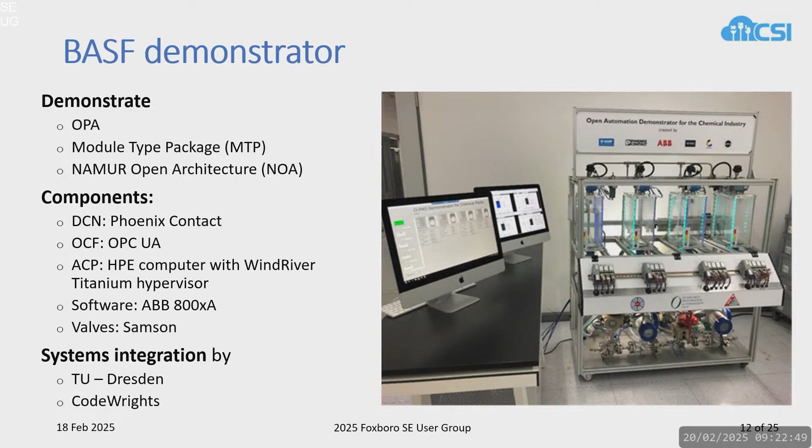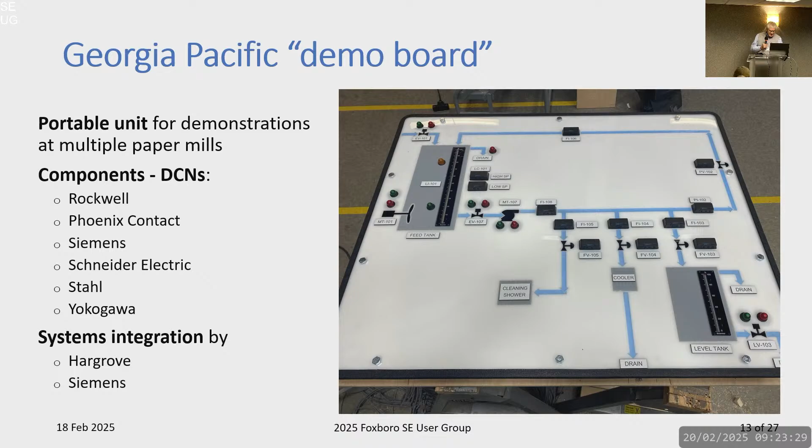Georgia Pacific, this was done by a gentleman, Carl Cherney, in Alpharetta. He built what he called a demo board. This was fairly early work, 2018, 2019, and he tried to assemble component products from multiple control system suppliers. Not really a full realization of OPA, but it was meant to illustrate the art of the possible. This board was taken around to paper mills and shown to people about what the future is going to look like. I don't know what Georgia Pacific has done with this work since Carl retired.

Dow has made a very significant investment towards OPA and digital twin technologies in a demonstration unit in the Chicago area under a government-funded program called MXD, which I think stands for Manufacturing Digitalization. This is a picture of the unit. What Dow was trying to accomplish with it is to demonstrate interoperability among different vendor products, the OPA computing framework, and digital twin technologies. We've had fairly recent discussions with MXD about getting OPA more prominently featured in the MXD testing environment.

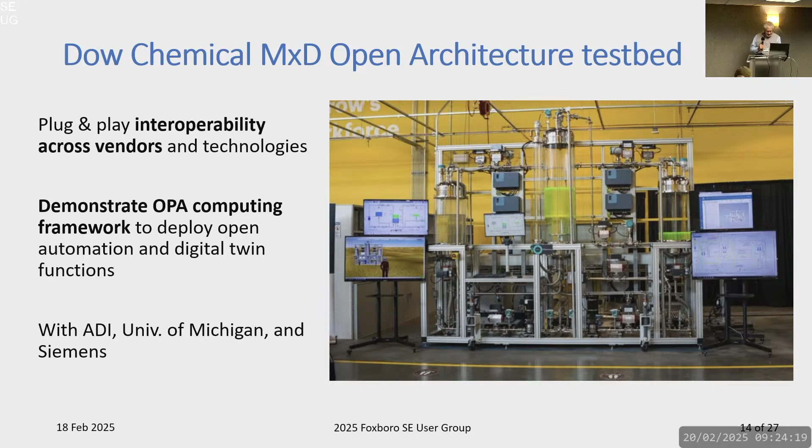My company and the other companies I'm going to talk about in COPA, which stands for the Coalition for Open Process Automation, have provided prototyping systems and training programs with a market offering we call COPA Quick Start. So COPA Quick Start is a fully functional system, suitable for laboratory use. It was not designed for production use itself. Has a lot of computing capability. The COPA group of companies are listed there, and I'm going to detail COPA in a minute, but you'll see EOSYS is included in that list.

COPA now has evolved our market offering beyond the Quick Start training system, and we're actually starting to sell and have sold systems for on-process production use, which I will share more information on in just a minute.

A little bit more detail on COPA, the Coalition for Open Process Automation. If you remember that chart of the business ecosystem, COPA is a group of 15 companies who span all of those roles in the business ecosystem I introduced when I started talking about the Open Process Automation Forum. We have systems integration companies like EOSYS, like Wood, like Burrow Global. We would like to add more. Subsystems integrators like my company, CSI, and another company coming out of Silicon Valley, CPLANE, and hardware and software component suppliers like Phoenix Contact, like Stahl, like Novasmart, like Codesys, for example, and inductive automation, which figures prominently in our offerings for HMI, alarming, and historian purposes. We also have some computer hardware manufacturers in the COPA coalition, ASRock and Supermicro most prominently.

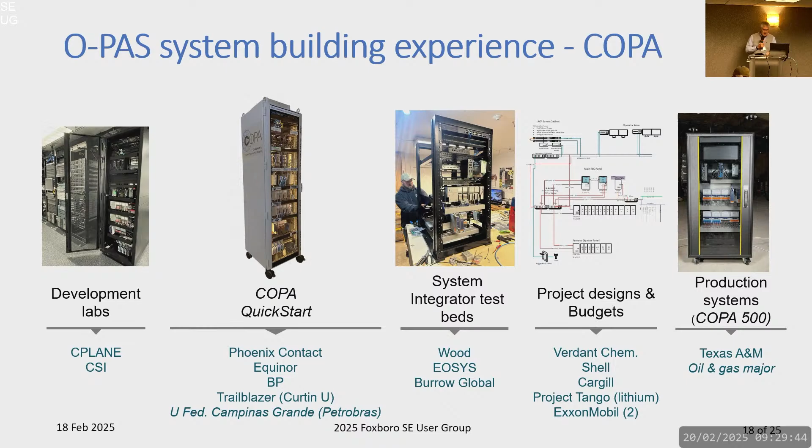So this is some details on our experience base with these on-process systems. The one on the left is the Texas A&M system I talked about. Basically, the footprint of this system we sold them is close to what I have out in the exhibit area. The only thing I wanted you to pick up from this chart is that this is a real project in a real manufacturing facility. It's about 450 I/O. Detailed engineering, the feed study is being done right now, and we will start engineering on that project in a couple of months with an expectation to commission before the end of 2025.

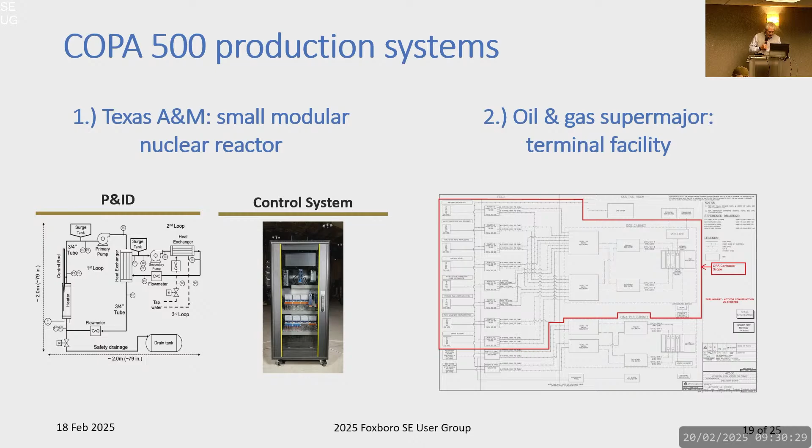This is a one-page summary of our message about what we're offering in terms of OPAS-based systems. Field-proven components implemented in an open architecture against the OPAS standard—that's the tagline. But what are some of the essential characteristics? Decoupling I/O from compute. I talked about breaking those proprietary connections. There's an OPAS industry standard that specifies the interface between I/O and compute.

Because one of the business problems maps back to the fact you really don't ever want to replace your I/O. The motivation for replacing your I/O hardware is in the unlikely event you're going to be replacing your instruments, and that's going to be an exotic case. On the other hand, you do want to replace your computers from time to time to keep pace with the capability of the products in that space. So decouple that connection between your I/O and your compute level.

Interoperable data communications fundamentally based on OPC-UA. Decouple software from hardware, with a couple of sub-bullet attributes I won't spend time verbalizing. Portable, reusable applications based on industry standard programming languages, also taking advantage of what we can do with virtualization and containerization. Build cybersecurity in by design: role-based access, authentication, zero trust. I could talk about all these things, but I'll only do that in response to questions.

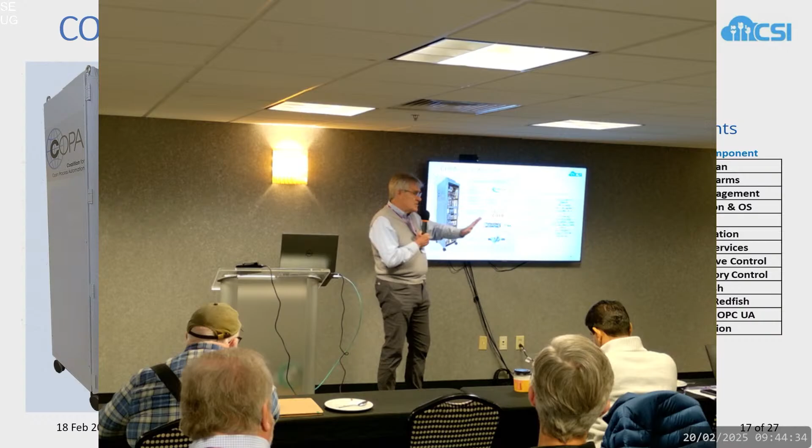So I left this out of the main presentation. This is the hardware and software bill of materials for COPA Quick Start. We may substitute over time, but this gives you some example of who is providing the hardware and software components. In the COPA group, Phoenix Contact and Stahl are member companies. We use Cisco, but we can substitute for the networking switch or networking hardware. For the DCN hardware, we prefer IPCs, specifically ASRock industrial IPCs, and we prefer Supermicro servers. Now we find the operating companies actually prefer, and this came up yesterday, maybe Dell or HP hardware, so that's substitutable there.

I won't itemize the software, Jacques, but you can see by function and by supplier who's used. Maybe a key question is, we actually like the CODESYS software for an IEC 61131 based regulatory control environment. If you don't know who CODESYS is, they're probably, without a doubt, the major hardware-independent software supplier. They've sold somewhere in the neighborhood of 6 million licenses for their software products. So this is how the bill of materials would be worked up for a project, Jacques.

One of the companies you mentioned, Phoenix Contact - Ghazi Azadullah is here in the back. Ghazi is with Phoenix Contact, and they're a member of the Open Group, involved in this effort. We've been talking to them about some of the hardware on our system. They have other stuff to show you out there - they've got a booth. Good to talk to him if you have questions, and talk to Don, who also has a booth out there.

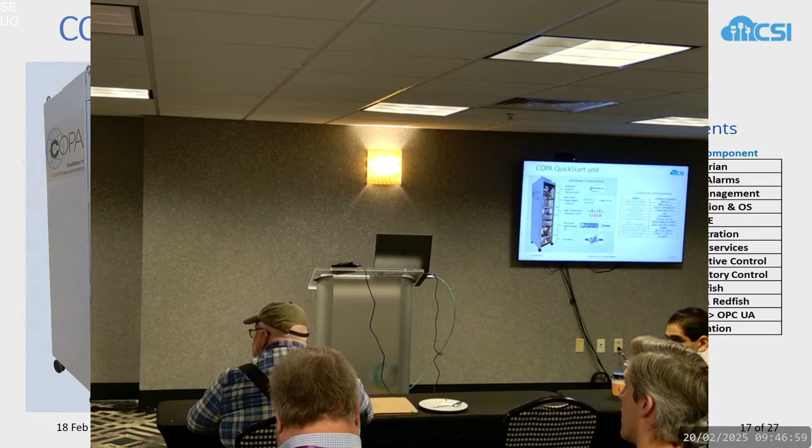I've got a question about fault tolerance and robustness. I'm sure it's configuration dependent, but how does it compare to the traditional dual redundant DCS or a TMR SIL system, like a Triconex or Woodward Governor system?

Basically, there's a number of ways to achieve high availability. You can do it with traditional physical pairwise redundancy. We actually prefer a software-defined mechanism to achieve high availability, so we can dynamically rehost a workload upon a hardware failure. We move a compute workload - there's always a backup, and that backup can be running where you have spare compute capability in your system. So we're taking a software-defined approach to high availability, which is really our lead case.

You can actually include fault-tolerant hardware in these systems - in my shop, we're also using Stratus hardware. If the operating company wants that degree of risk reduction, you can do that. Now, we're not attesting that we're going into SIL 4. In fact, safety systems are out of scope. Shooting for SIL 3 is beyond what we're currently targeting. So I'll answer the question that way.

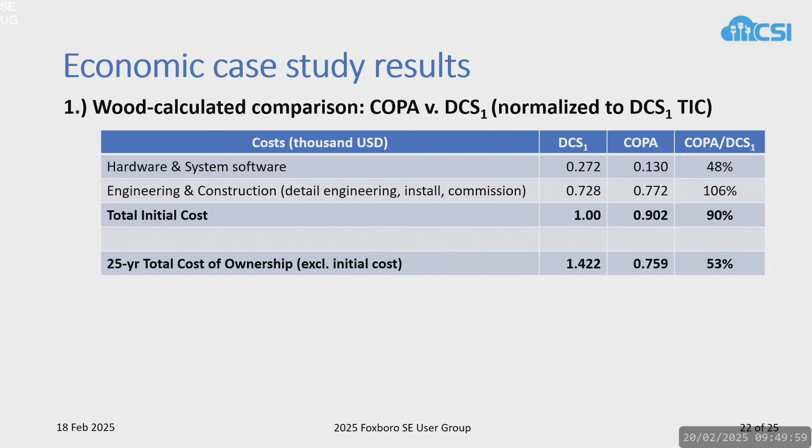Okay, so I'll make a couple of comments. That's where the role of the gateway would come in - I'm going to answer your question somewhat strategically. I went through the reference architecture pretty quickly, I usually use it to define terms, but let me go back there.

The other thing to think about for the future is this NAMUR initiative called Module Type Package. This doesn't help you in the brownfield, but in the future state, if there are still proprietary PLCs in this market, if you conform to the NAMUR MTP standard, you have to at least expose the internal workings of the control on your packaged unit so it can be interfaced to at the supervisory level.

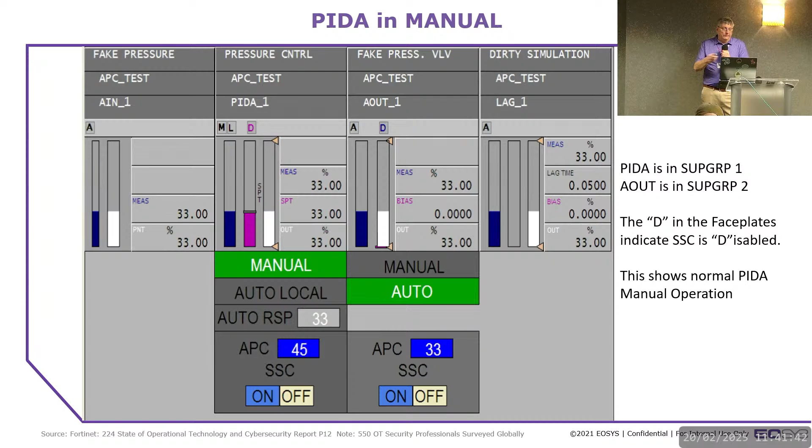Then we can put it into auto and local, like I said, now we're just running down the thing. Now the D on the faceplate up here doesn't even show up unless you have a supervisory control set up, the SUPGRP, and then you'll see the D, and that indicates that it is disabled—supervisory set point control is disabled. And on the output, the D is telling you the same thing, that we're not driving it from somewhere else.

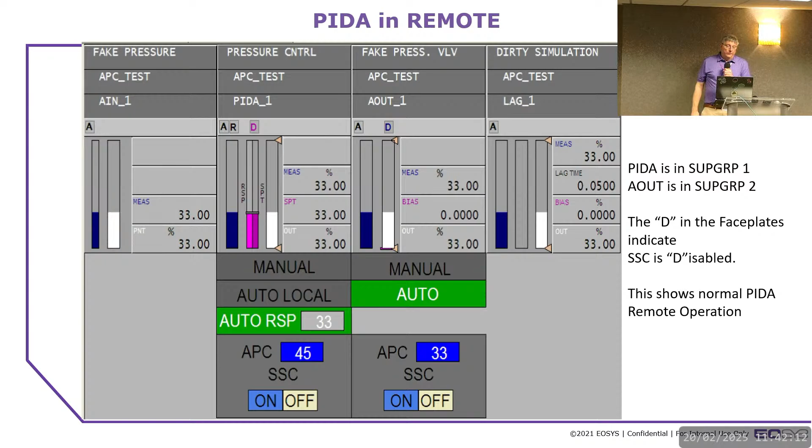This is auto with remote set point, same thing. You can see we still have it disabled.

Now we have enabled the supervisory set point control. Again, this can be coming from an APC system, your advanced process control. This could be coming from some sequence logic that you wrote to drive this, or it could be coming from OM sets. So depending on how you want to drive this, you just connect to another block to get that supervisory input. But if you have an unsecured connection, it's available.

At this point you see that we go into E, okay, on the faceplate up there at the top. It's tiny, but you also see that the green isn't quite the same color green. That's because when you have implicit handshaking on it, the block is now waiting to see an output change on that supervisory input to go into a control state. So it will sit there holding its last output, doing its thing, until it sees the supervisory control actually write a value in.

When it does write a value in, notice that our little color on the block down there where it says APC changed to green, and the C goes to controlling up there. At that point, this guy is in supervisory control.

Well, okay, what's the big deal? They got supervisory control. The big deal in this is going out of supervisory control, your APC, if you were to fall back to, in this case, remote, that's based on your local remote switch.

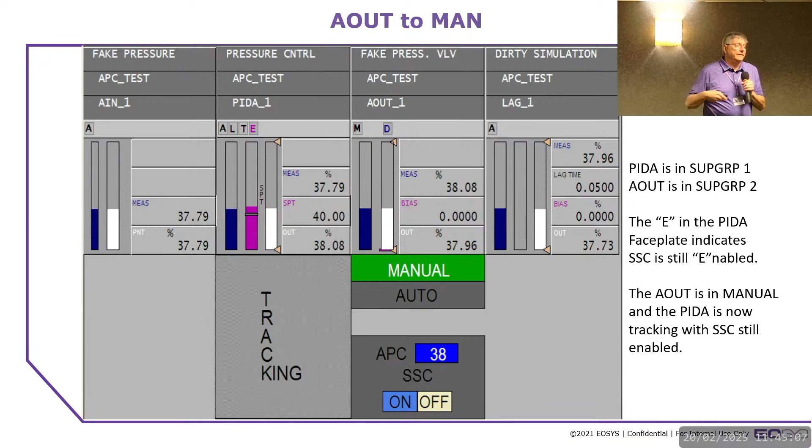But at this point, again, what we're trying to show is the fact that all of these interconnections are all bumpless, they're all built in. So now we go to APC. Well, if we grab from the APC the A out block, not the PID block, we're not working off the PID block, we're working off the output block, and we're going to let the APC just manipulate this output.

Once again, when we do that -- and this is in a different supervisory group, and I did that on purpose so that I could manipulate the output independently -- you can see that when we turn the APC on, the output goes into E for enabled, and the PID goes into E for enabled, and everybody is just hanging tight until the supervisory control writes a value down to that analog out block. So at this point, your process is saying, okay, I'm waiting for that guy to tell me what to do. As soon as we make a change, I change the output from 33 to 40, we go to controlling on the analog out.

So now we flip this guy. Maybe you've got two loops, two advanced process control constraints you want to work with. This guy can now drive the analog out, and we're still in a good spot on the PID.

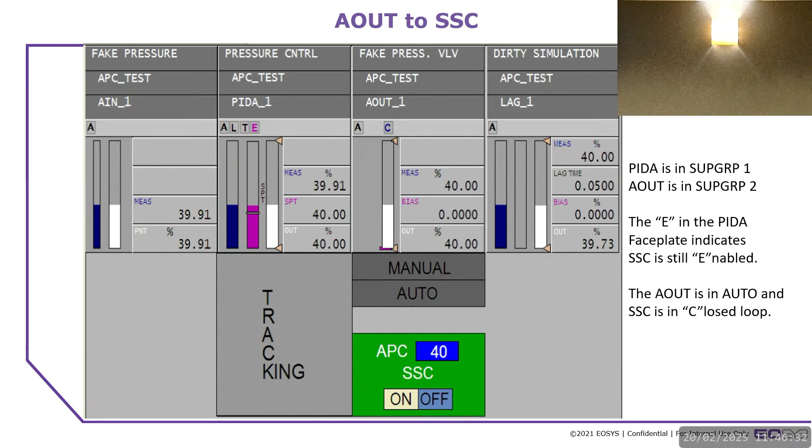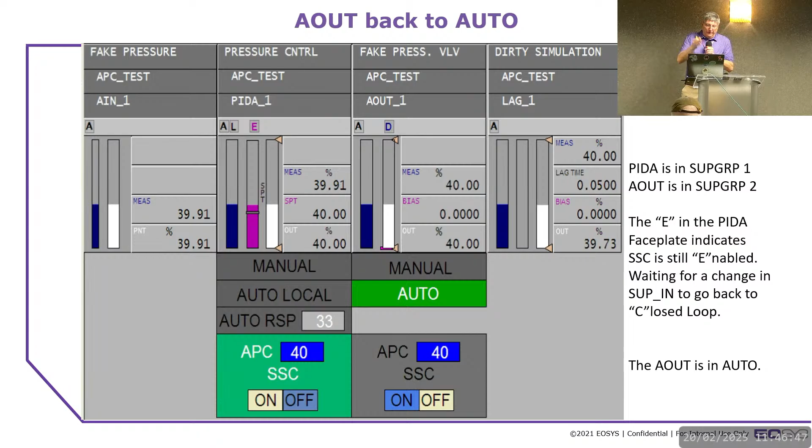And then the next part of this is we flip that guy back into auto. Hey, look, without anything else, we just said we don't want to be in supervisory control on the output. The PID is back to state enabled, but as soon as we did that, he came out of tracking, and he's waiting for that APC to write a value down to him. As soon as that value changes, he goes back into control on the APC.

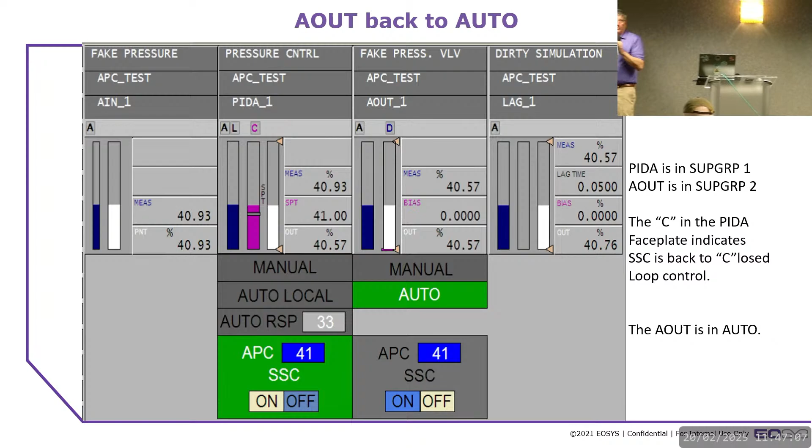And all of this stuff again, it handles it very well -- these set points, these blocks, the way they track, the way they come through. So you have an option there: you can actually work the output directly, manipulate it, and it gives you a clean way to set up multiple inputs into that system.

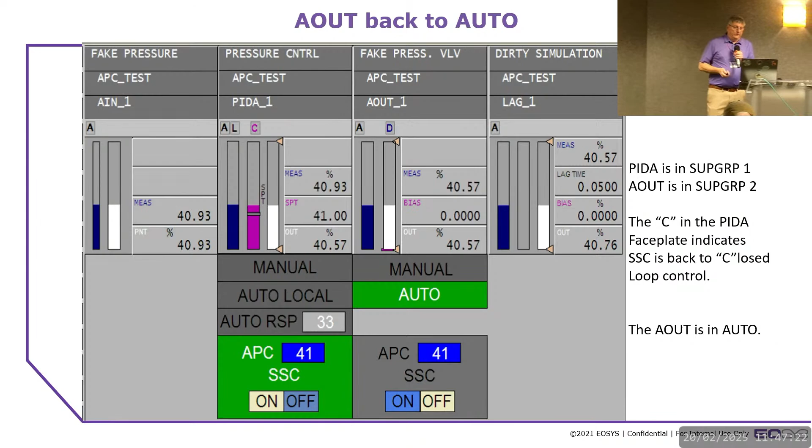So I'm going to just jump out because I don't think that's worthy of any questions at this point. Marcel is going to talk to us. Oh, and these two topics are related. This is why we got them all together.

The APC, a lot of people are using OPC, and we're now going to be talking OPC-UA. That's what this topic is. But most people are using some kind of OPC to let their APC talk down to the controllers. That's why this is in this topic, because these are ways you can get down to those blocks.

The next thing I'm going to let Marcel talk about is Foxboro Schneider now has an OPC-UA server. And then when they get done with that, Kevin White and I are going to talk about the OPC-UA client. Both get a microphone - if you step over there to Matt, he'll give you one.

All right, so the OPC-UA quick reference. This is Kevin White from Alabama River. I appreciate him coming up here and helping out with this - he did the heavy lifting down there. And Arlie Bright, who is so smart he doesn't even come to these conferences, did the heavy lifting for us. So I'll be playing the role of Arlie in this, and that's why when I get confused, I'll just look at Kevin and go, I don't know, maybe Arlie knows.

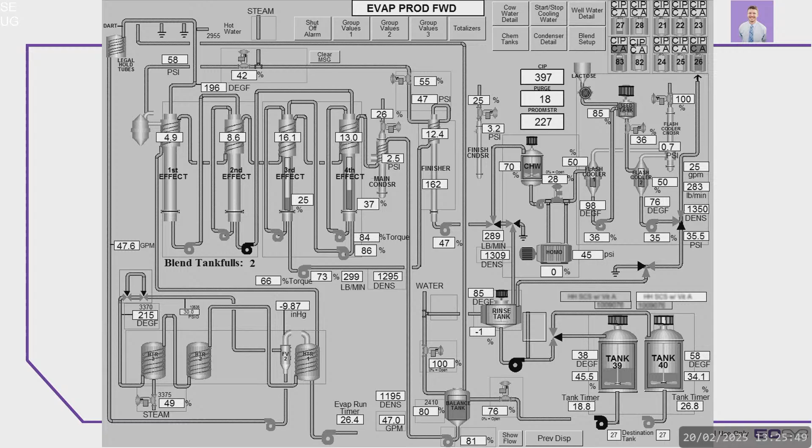The other piece that people say a lot is to get rid of the 3D objects. You see a lot of realistic looking graphics. So, this isn't great, but I took Visio and I said, okay, now I've gotten rid of all my 3D objects. Is this a high performance graphic now? Still not. So if there's one thing that I can get you to leave here and remember, it's that ISA 101 and high performance HMI is more than just grayscale.

I'm next, and I'll just say I'm not going to go through the standard in detail. We talked about a few points of it, but the biggest misconception is that ISA 101, the ISA standard for developing HMIs, is not a list of rules. There are very few things it says you cannot do. What it is, is a guide through that process. It tells you that you should think about how you use color, how you navigate between screens, and make decisions that help your operators.

So at a very high level, it specifies, in blue here, an HMI philosophy, an HMI style guide, and an HMI toolkit as the starting point of this process. You go through those, and two of those are documents. The third is your HMI library. It talks about designing HMI screens, what kind of questions you should be asking, how you should think about these problems. And then lastly, it goes past installation, into how you maintain and manage these HMI graphics going forward.

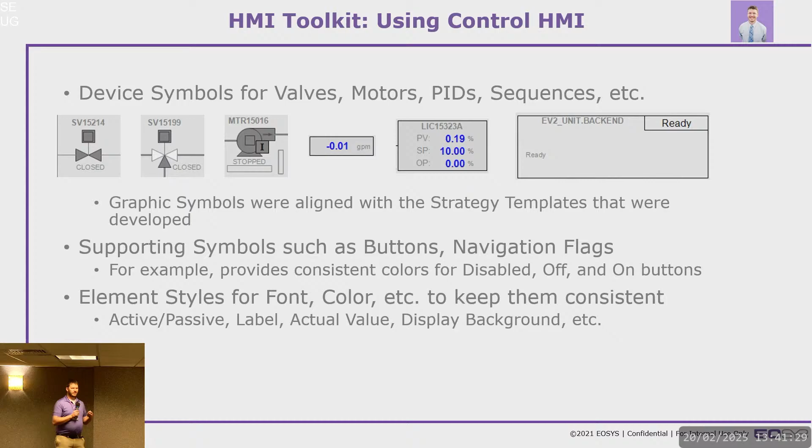Element styles are another feature of control HMI. There are a bunch of element styles, which if you're used to FoxView or Foxdraw, are like conventions but better and easier to use—you don't have to copy some random file or go look up the manual. You can configure your styles. Some of the built-in ones are the active element style.

I'll contradict you a little bit, Bob—I don't know if you realize we did this, but we didn't use the built-in colors. The two we swapped were active and passive. The default was dark gray for running and white for stop, so we swapped those in the element styles, and it updates everywhere you're using that element style.

Yeah, so I list a few examples: active, passive label, so that your text size is consistent for like a device tag, actual values. You can kind of pick what is part of your style - font color, font background color, font size, all of these things you can have be part of that style, or just leave it off and set it on a case-by-case basis.

All right, so now you've got your standards, if you will. It's time to go figure out how well they work in the real world. This is potentially your first project, so I'll be repeating Bob a little bit on some of this stuff.

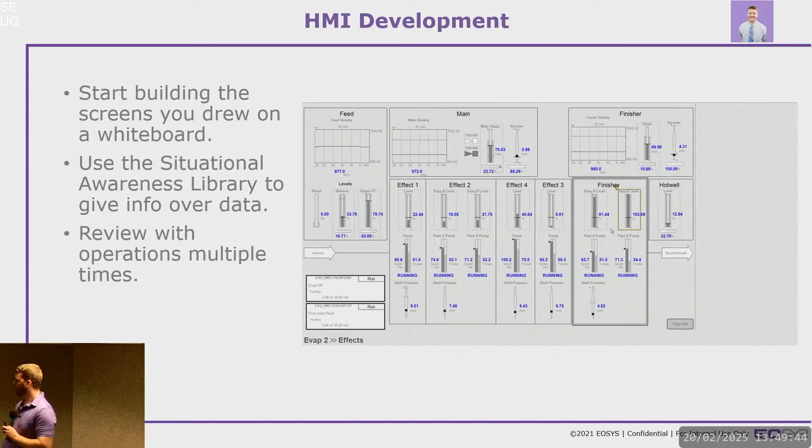That could have been a whole presentation by itself, but we came out with these whiteboard designs of what needs to go on a screen. Then HMI development, you've got your toolkit, so hopefully this is pretty quick. You start building those screens based on the whiteboard.

I mentioned the situational awareness library is included in Control HMI. So a lot of these symbols you're seeing, the vertical bars, horizontal bars, a lot of that is based on the situational awareness library. You can duplicate that and customize it a little bit, but it gives you a lot of good starting points.

And then lastly, through this whole thing, again, one of the areas of projects we didn't do that well was going back to operations. It's always hard for us. I imagine it's the same for you guys to pull operators from their daily activities and get them dedicated and focused to a project that's not going to finish for 6 months. But you'll save yourself time in the long run, as we've all learned before.

The last comment I'll make is that with high performance HMI, it's very much not like, okay, we've designed these screens on the whiteboard, that's what you're going to get. It's very much prototyping, showing them something, listening to what they say, coming back with something different, offering up different ideas on how best to give them the information they need.

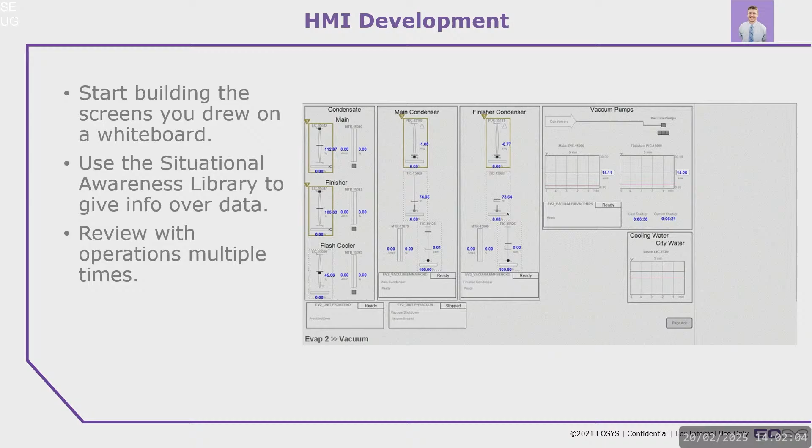Yeah, the long answer is the standard - I won't quote that to you. The medium answer is a book called, Dave correct me if I'm getting this wrong, the High Performance HMI Handbook, I think - I might have gotten one word wrong there. But it's a thin book, a couple-hour read that talks about the guys that came up with this, they did studies and trials, all for the purpose of - the name gives it away - situational awareness. You want to be able to quickly understand what's happening with your process.

So that, and getting rid of a lot of - I won't call them bad habits, but maybe artifacts - of, you know, when HMIs first went to graphics instead of panel boards, it was like CRT monitors and oh this is so cool, we can do a lot of stuff. So in a lot of ways it's going back to what the panel boards gave you, in that you could look across a panel board, all my lights are in a row, all my analog dials are straight up and down, everything's good. So a lot of it is really inspired by that type of quick glance.

Your operators, they had previous FoxView experience? I mean, they were control operators already that were moving into this area. Yeah, absolutely. We used the operators from the existing evaporator to help us start the second evaporator.

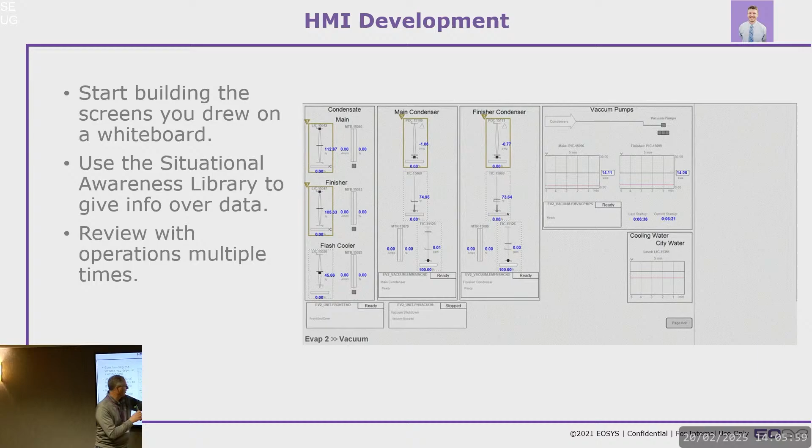If we're over, I apologize. But another thing - you'll see these arrows for navigation. When you push those, you go to that next section, and when you land on that next page, it'll leave your little button where you came from highlighted for a moment. I really like the navigation - you guys did a good job on that. That's not something I specifically asked for, but I do like it. There's another real question quick, over there.

I don't know the Control HMI product that well, but I know in FoxView there are some hard-coded indications from the control system, like cyan being out of service, red being under range, over range, green meaning something else. Did y'all have any landmines there? Does Control HMI enforce those same colors, and did you step on any toes? So were they any of that?

They default to the same colors. Similar to element styles in that same configuration - you could change it to not be cyan, you could change it to be something else, but by default they set the defaults to look like FoxView FoxDraw.

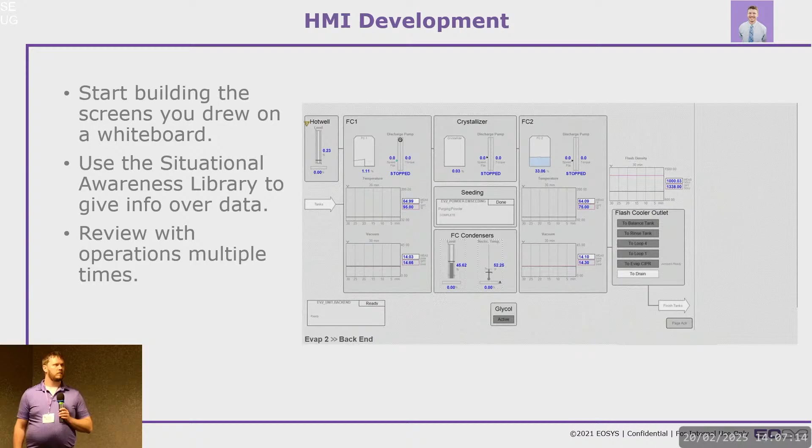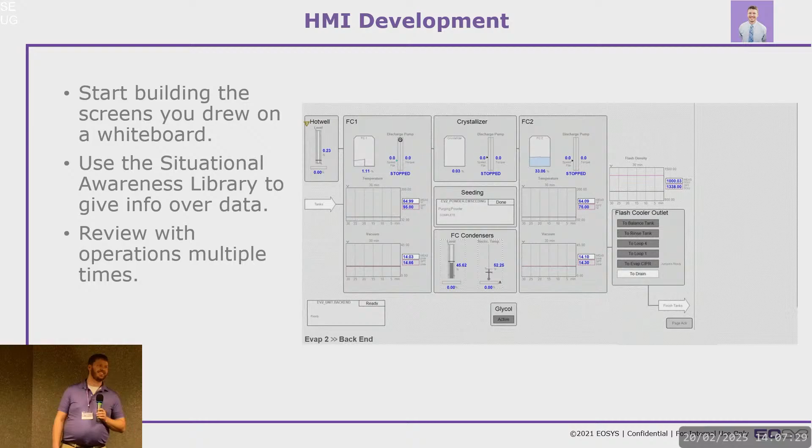I know years ago when I first went through some of this stuff, I went to the local university and said, hey, I want to learn about the abnormal situation graphics, not Control HMI, but that stuff. I'd read the book and went to the engineering department at my alma mater, UAH, and they said, you got to go to the psychology department, the guys that do that are over there. And I'm like, yeah, I'm not allowed over there anymore for a lot of reasons. But that's where they still got studies of me going over there.

But yeah, it's kind of interesting because this is all an engineering discipline, and we have to implement it, but all of these are human factors studies done by the psychology department. So it's not stuff that kids are coming out of school with much background in. There are a lot of books on it, and you can read a lot of stuff, but it's not things we got exposed to as engineers. So we're having to go back and learn that.

It's kind of funny - I joked with Don early on. You kept saying you were talking about operators, and I said, who are these operators they keep talking about? We'll just tell them what to do. I mean, it's like - but that's not really the way to go. I know that, but anyway.

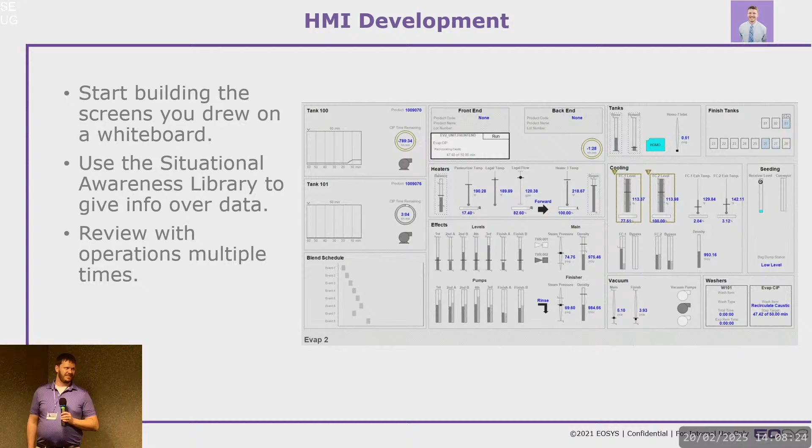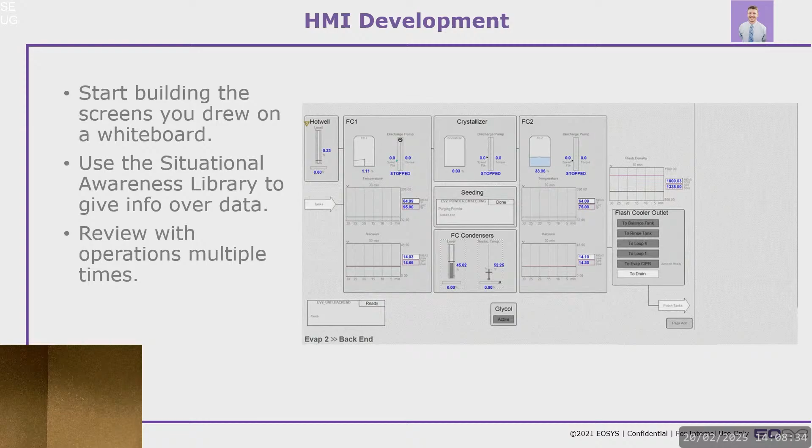The old FoxView, the nice one, you say? Yeah, that's where the plant lives, right? And so when you do this, you have to give all that up. Yeah, it's a good way to see how it works.

It's busy for an operation. Can you tell me what's going on in the screen? It's busy, and to Dave's point, this is not based on human performance, whereas the high performance one is. There's a reason why it's still called situational awareness with high performance graphics. There's a reason why those terms are used. This really doesn't. I'm not saying you don't have the right to like this - a lot of people do love this - but this isn't that.

Oh yeah, this would be a level 1 screen. No, I'm not saying this is not a level 1 screen, anything - but like the level 1 screen is a depiction of this, but it has areas. It has this effect - it's level 1 in scope, but not in detail.

So there's just too much information on this. When you get into a level 2 screen, you start drilling in on an area and what's important - they call these their blend tanks. So I'm blending, I'm looking at the blend screen. They had quad monitors, so they kept usually a bunch of level 2 screens up, and maybe the level 1 and then 3 level 2 screens.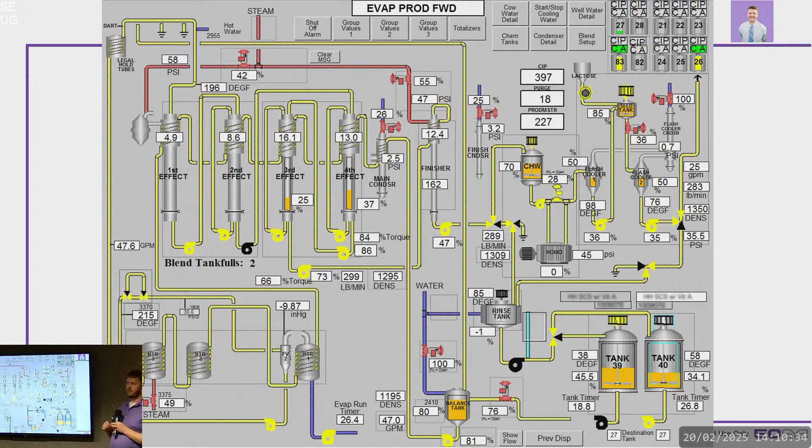Until you need to go do something abnormal. If you're designing it, anytime they're going to a level 3 screen during normal operation, you should think about why - that should be an abnormal situation or some kind of manual intervention. That level 3 is the level of detail - like if you took this and made it bigger, that'd be a level 3 screen.

So if you make your navigation flows, you can still kind of follow the process through, device by device. Like if you're trying to figure out why you don't have any flow, you follow that through. That's one of the use cases, one of the functions the operator needs.

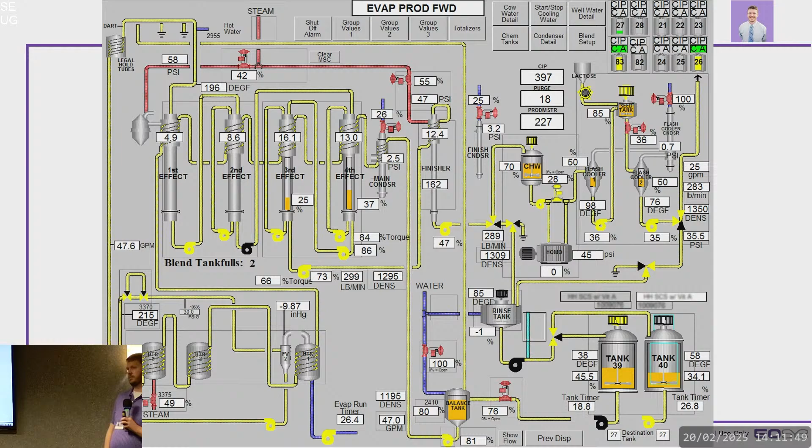So guys, just to comment on that screen - there's too much color on it. I agree with you as far as the standard's concerned, but you cannot get away from having a process flow, because you have to understand that the outside operators will come into the control room trying to learn how the overall process works, and you've got to have that. If it's just faceplates, back like it was a long time ago on the panel board - and some of you guys that's got hair as gray as mine probably remember some of that - it was very hard to train operators how to run with just faceplates or a panel board, versus if they could actually see how the process went together, they understood it better. So I think it's wrong to get away from process flows like that.

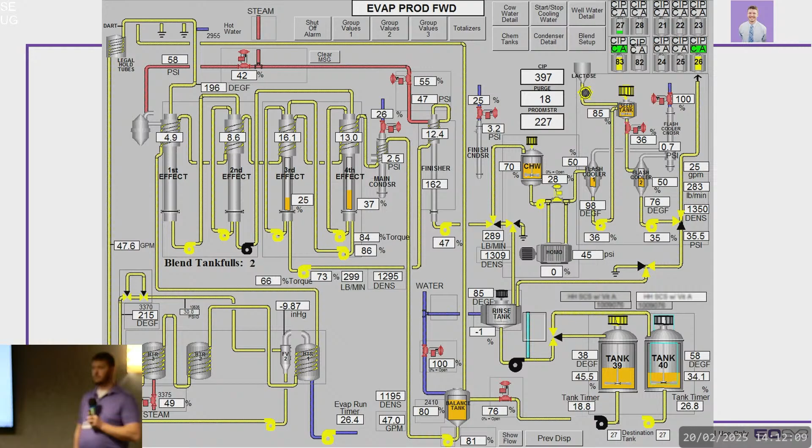That could easily be cleaned up, and possibly that gets cut into two graphics based on wherever the break could be, based on how you would start and stop it, so you're not having to switch back and forth on graphics or what have you. It's just a comment. Yep, understood.

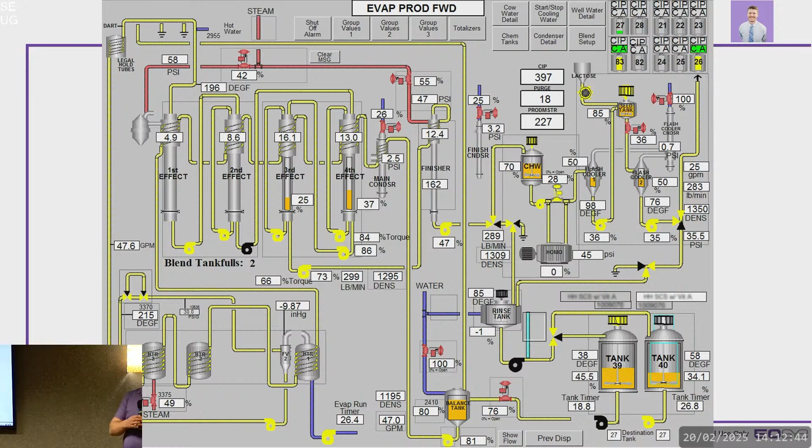And another comment I'll say, as far as getting operators involved, I think it is very, very important. But if you're putting in a new system with existing operators, you have to teach the operator. First of all, usually just pull one out - that's where I've been very successful - pulling one operator out that the other operators respect. So you pull that guy out, and then you show him, because they know what they have now. They're experts on it, but they don't know what they could have. So if you can show them what they could have and how it could make their life easier, they'll get buy-in, and the rest of the operators will buy in off of that guy. That's where I've been successful.

You mentioned one operator.

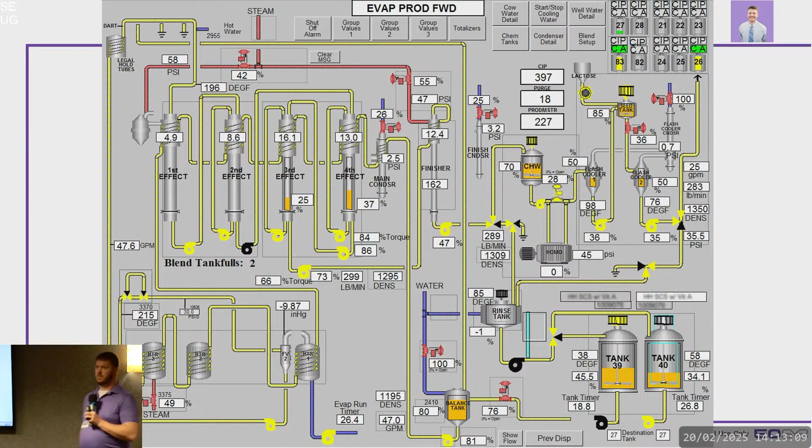I want to touch on that. We definitely had, I think in the early design phases, more than one operator. As many people as you can financially pull in to get ideas from in the back-of-the-napkin phase, because sometimes your best ideas come from your worst operators, because they think different than your best operator. Your best operator is an expert. If you have to explain something to somebody who doesn't understand that well, you get a lot of good ideas in that phase.

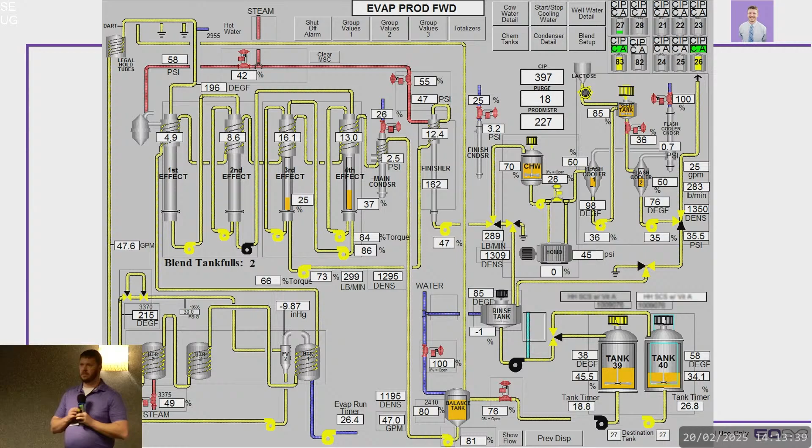On this project, like I was mentioning to Bob, I want that operator who's as cynical as can be about it, but without completely sabotaging it. You don't want the operator that just agrees with everything you say. You want that feedback, even if it's a little demoralizing to have them complain about your graphics all the time. What they're saying is real, and you just got to pick out the parts of that that are useful.

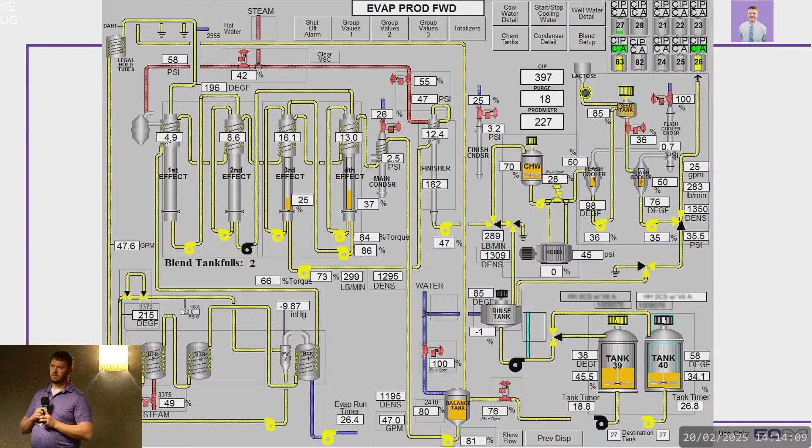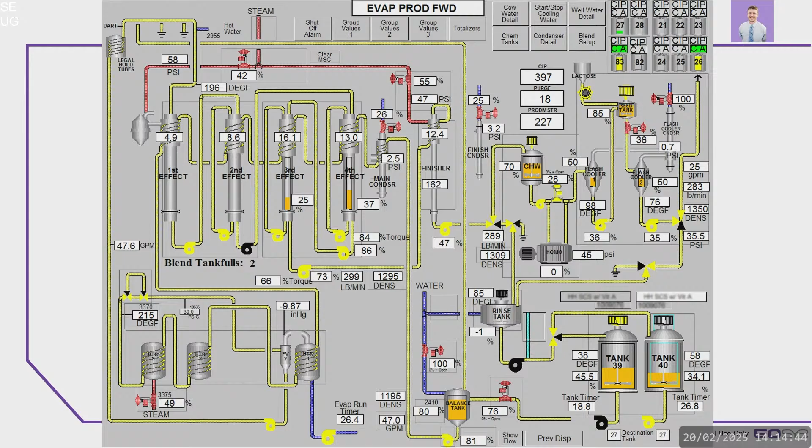I'm not sure about the other facilities, but I'm not the one training the operators where I come from. In your experience, one other thing - we may have a high turnover of operators - what is the experience of, say, a lead operator or whoever's training new operators, as far as one versus the other? Is one onboarding quicker?

So I'll give you two answers. The first answer is from the high performance HMI studies - that's one of the metrics they use to determine, hey, we should start doing this. It made very little difference to experienced operators if you went to high performance HMI. They're so good with the graphics they have, they know where to look, they don't have to find the number on the screen, their eyes go straight there. Where it really brought advantages in the studies they did were training new operators and having them respond to abnormal situations.

In my experience training, I can only give you a part of an answer, because when we install systems, we work with the operators there. We don't stick around and see them train an operator six months later. So there's not a lot to add there - I would stick with the textbook answer on that.

Since the beginning, like when we started, you guys were mentioning one operator that had that strong personality - somebody comes to mind, we definitely had that. Second thing I want to say is that person has already trained a couple of people on this system. So this guy who was the strong personality, a little bit of an opposing view, is now not only using it every day, but has trained a couple of people already. That's up to operations, but from my perspective, it looks like they're kind of taking off with it, so I don't see any negatives there. I don't know if that answers your question exactly.

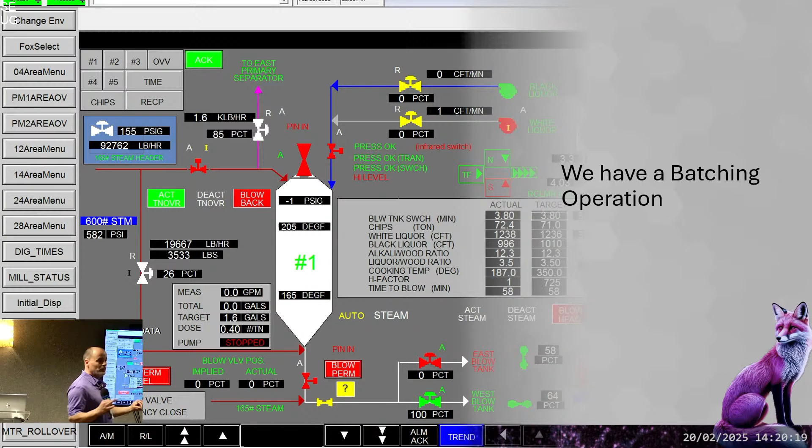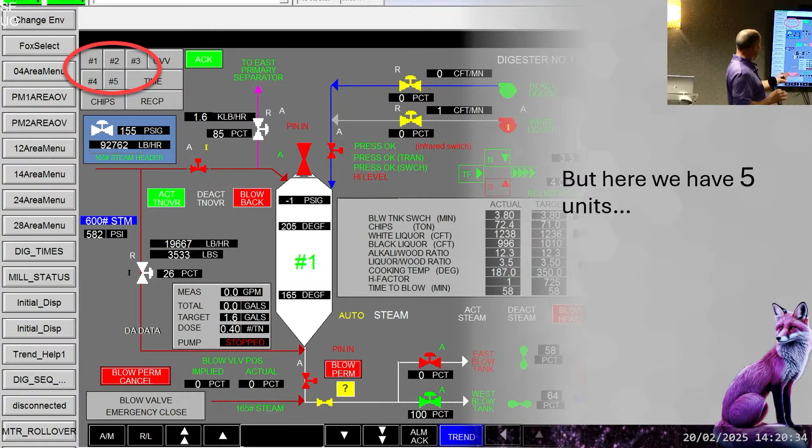So here we have a batching operation. Easy enough. But now when you say, hey, we've got 5 of the same one, and we want to make sure they're all consistent, we have shared resources, shared destination, blah blah blah, it all gets more complicated. Now throw in the fact that it's all written in HLBL, so that makes it even more complicated.

So let's make it real for a second. You hadn't thought about this sequence in months and months, and if it was me, days and days or hours and hours is enough to completely forget this. So now you get a call in the middle of the night. It's 2:30 a.m. Saturday night.

You stayed out late the night before, didn't get in bed until 8 o'clock. So then the operators, what do they do when they call you? Every one of them is like, everything is broken, we're behind, everything is backing up, we got to have you here as quickly as possible.

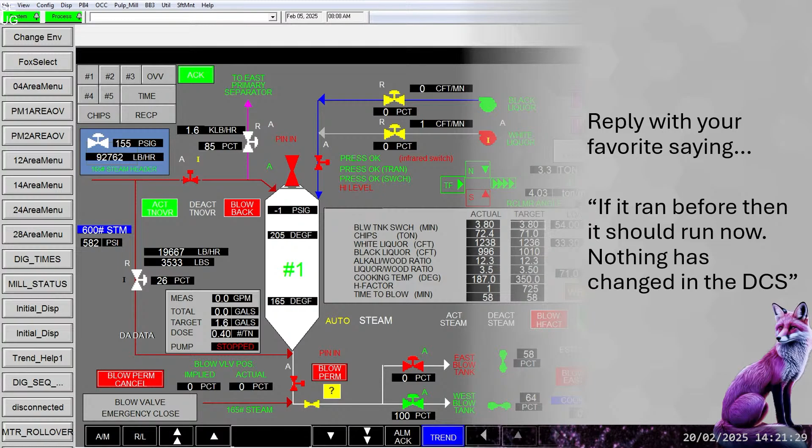One of the first things that comes to your mind is, it's not a DCS problem. If it ran yesterday, it's going to run today. Nothing has changed. Then they tell you, hey, the mill manager is here and he's there to help - in other words, get out of here as quickly as possible, right? So we grab our coffee, we head to the site. Here we go, let's jump in.

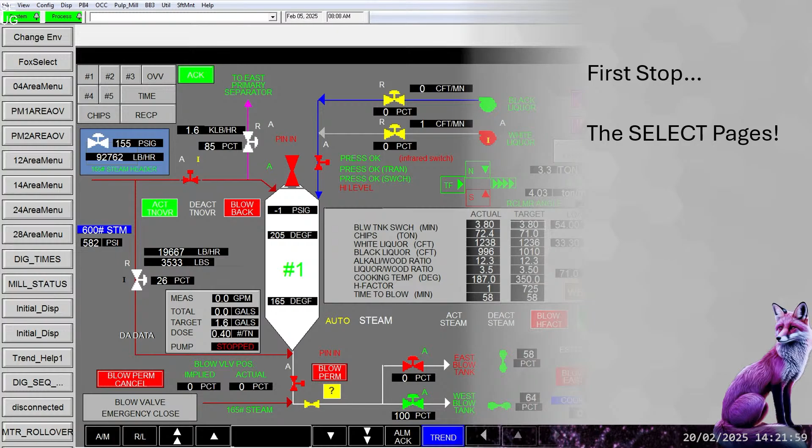First stop, everyone does the same thing - let's run to the select pages. So, prepare to be amazed, mill manager. Oh, crap - we're in the wrong AW in front of the mill manager. Hi ho, hi ho, off to the right station we go, to stay in character with Dopey, right?

All right, so now we finally get to the right AW. We got the right sequence pulled up, and now we expand it. Hey, everything's looking a lot better, right? All of a sudden you see, wait a minute, this line - you can't see everything, right? And you see the 'and not.' That means and not everything is shown.

So then you look a little further down the page and you see, hey, I can read this, I get what it's doing, but it doesn't make any sense to me. If you have good programming, if you were looking at the actual logic, you would see this line is closing the liquor valve. Down here, we're setting the white liquor accumulator. So this is a preprocessor helping you out.

It tries to hide a lot of the stuff from you. So let's go and look at the actual logic. Now, thank you, Foxboro, for putting this little source code here. So yeah, let's jump in.

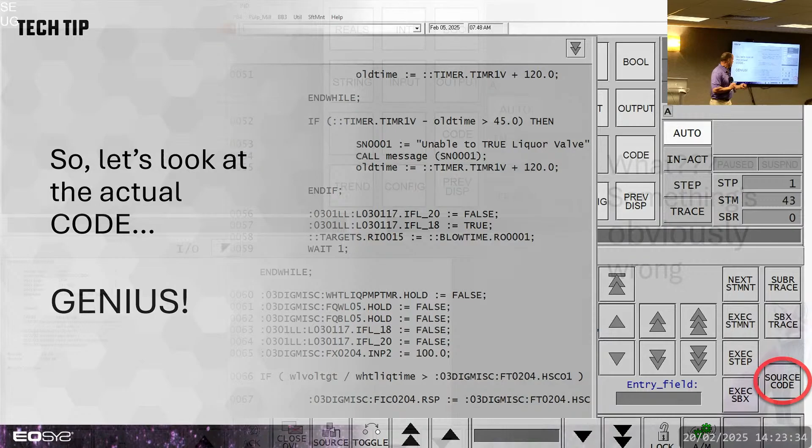Wait, this can't be right - that's all there is for this sequence when you pull it up. Go to the S file, sure enough, all it is, is include files. So guess what, you have to find the include files, right?

When we finally find the troubleshooting screens or the actual code, all of a sudden you don't have the numbers out here, so you're going to have to figure out where we are in the logic, right?

So after this is all said and done, the question is, how do we improve? And if you're like most of us, you build some sort of a troubleshooting screen, right? In this particular episode of what we did, we actually built a troubleshooting screen. To fill you in on the number of sequences we were dealing with, this is all of the sequence blocks you're dealing with - the ones that are inactive are gray and the ones that are active are white, right?

So it's not really high performance, but close enough for us who think gray is high performance. So let's go a little deeper.

So you select one of these buttons and we come to level 2. And the level 2 graphics, you'll notice, hey, look, here's all the logic broken down into segments. And not only is it just the logic, it actually has the subroutines and the exception handling and all of the logic as well.

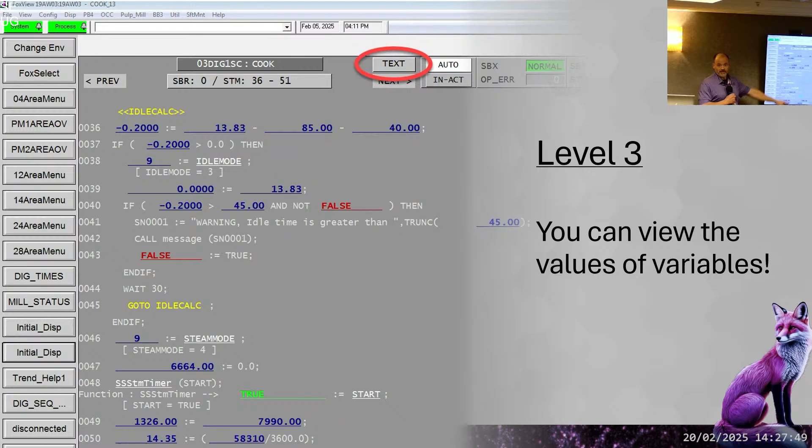See the value button up on top? You mash it, all of the values show up. So you right click on any of the values, you see your compound block parameter.

So this is a notorious string because if you actually see the very first line, you have if blah, blah, blah, minus blah, blah, blah, greater than. If you've ever tried to troubleshoot a sequence as you're running it, by the time you go and look at this value, look at this value, look at this value, and then look at this value, everything's changed again, right?

Well, the cool thing is when you have this that you can click on, you can all of a sudden see -- unless you're like me and got to pull out a calculator and it takes too long to plug it in -- but then you could see if this is true or false, right? Real quickly.

So for those like me who cannot think without a printout, we also created text files that do the same thing. It pulls together all the include files all in one place, and it puts the logic in there. The cool thing is it actually corresponds with the .r file line numbers.

At the very end, for the people that are used to the old PLC, it has cross-reference. The ones that have the asterisk beside them, those are destructive sets. So if you're looking through your logic trying to figure things out, then, oh, by the way, cook mode is actually set to something on line 131. Or a couple of other places where there's multiple places where that value is set, they're also shown.